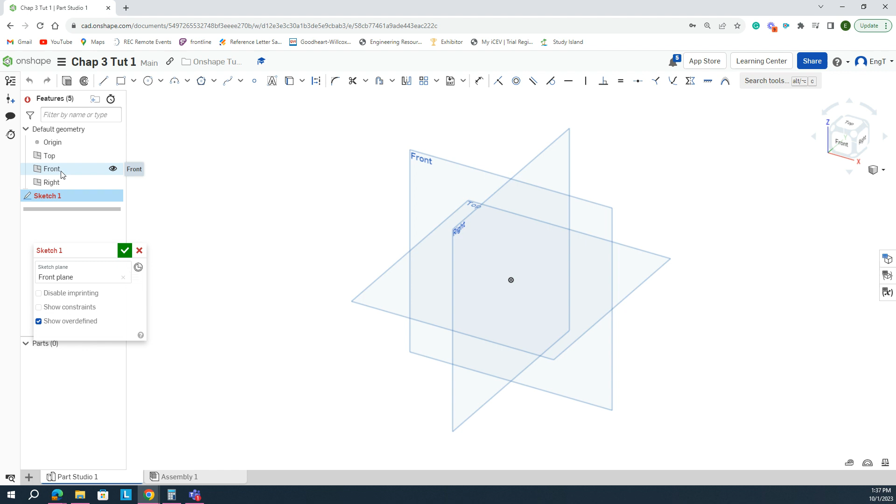Now the Onshape Part Studio pops up. We're going to click on sketch, and then select the front plane. Once we select the front plane, I want to hide the other three planes. So I'll right click on one of the planes on the left, or I could right click on the plane over here, and go to hide all planes. So I'm just left with my sketch plane.

Then I'm going to click the letter N, or go to view normal to sketch plane. Now this particular drawing starts out with a rectangle.

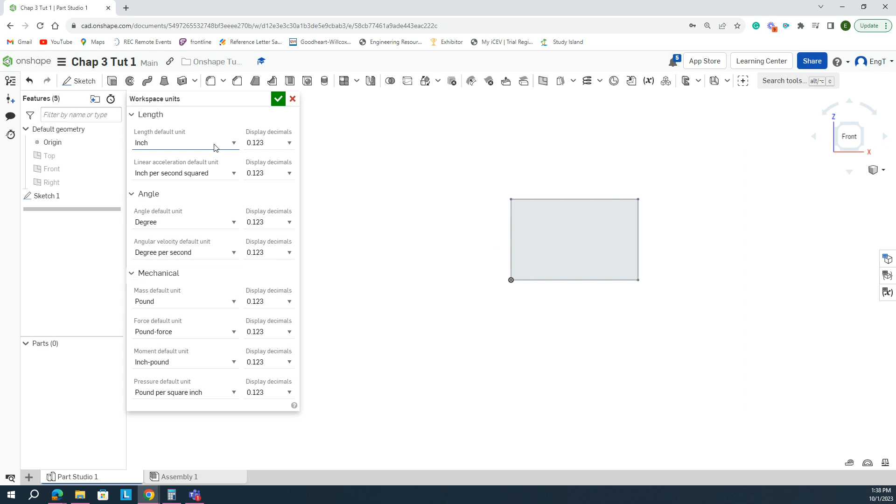So I'm going to go ahead and start out with a rectangle, but I noticed I did not change my workspace units. So it's in inches. I'll quickly go into my menu button and select workspace units, and change that to millimeters. Hit the green check to enter my settings, and then I want to continue this sketch.

Now to continue this sketch, I'm going to double click on sketch 1 to reactivate it because we weren't finished with it yet. If you notice, I started at the origin. Now I'm going to activate my dimension tool.

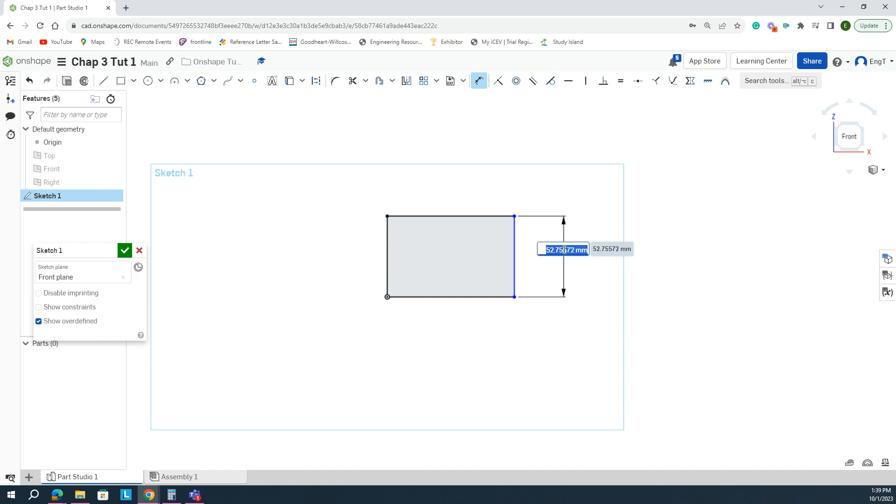I'm going to put the dimension for this line, which is given as 40, and the dimension for the top, which is given as 50. Now that my sketch is fully defined, I'm going to hit the green check to enter those, and then right click and go to isometric.

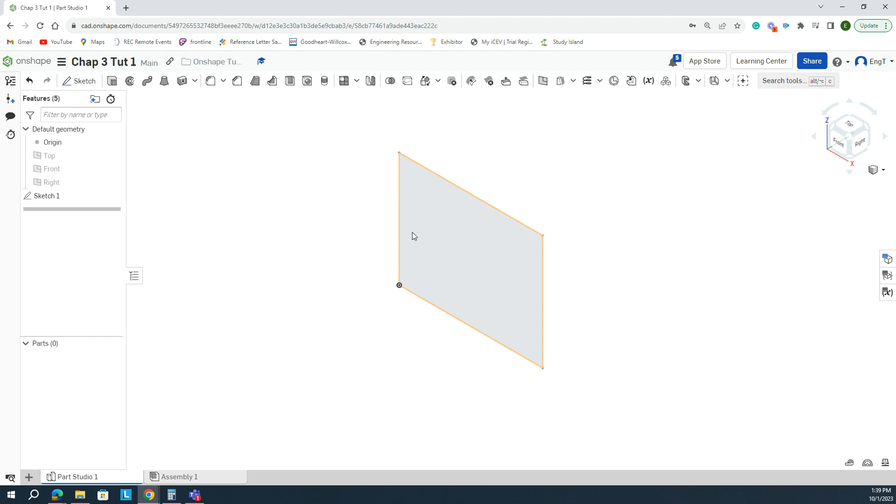Now I'm just converting the sketch to an isometric view. Okay, now we are required to convert that sketch to a three-dimensional view by clicking on the extrude button.

Once we click on the extrude button on the top left of the screen, we're going to change the depth to 65, and then click in the space that we're trying to extrude.

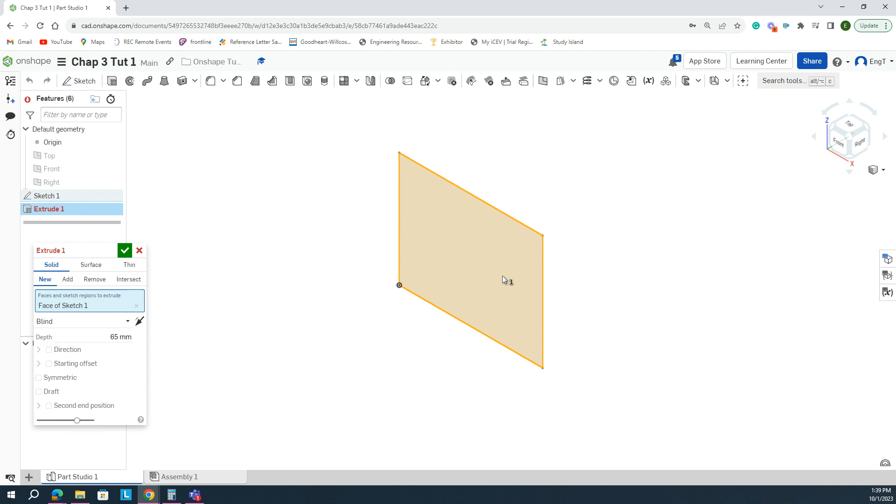Now if I wanted to change the direction of the extrude, I could have clicked on this button to change the direction, but it doesn't matter at this point. We just want to make sure our shape is extruded.

Now we have our isometric block. There's a cut that goes through the center. Now how do you do that?

We're going to select the face that we're going to create the sketch on to cut it through the center of the drawing. So I select the face by clicking here, and then I'm going to click on sketch.

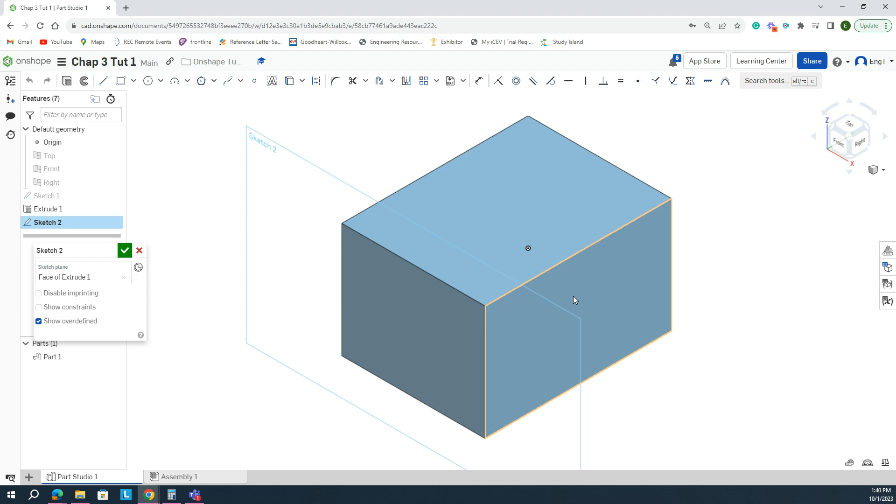Now if you notice, my sketch plane pops up on the outside of the drawing, and as I right click to rotate it, you'll see that the sketch plane is on the outside of that face. Then I'm going to right click and go to view normal to sketch plane.

I'm going to activate the rectangle tool again, and slide or hover over the right side of the box or the right line. As it changes to orange, I'm going to click it and make a shape.

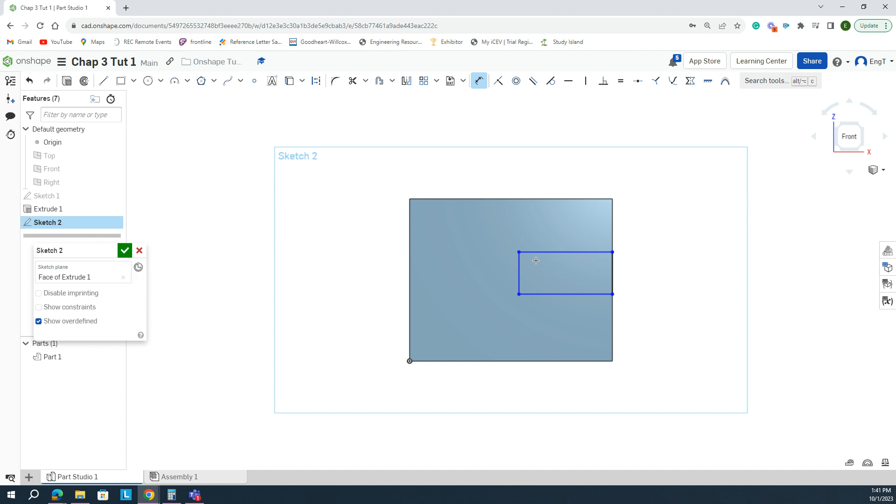Now on that shape, I'm going to activate the dimension tool to fully define this sketch that I just created. So the top line is given as 38.

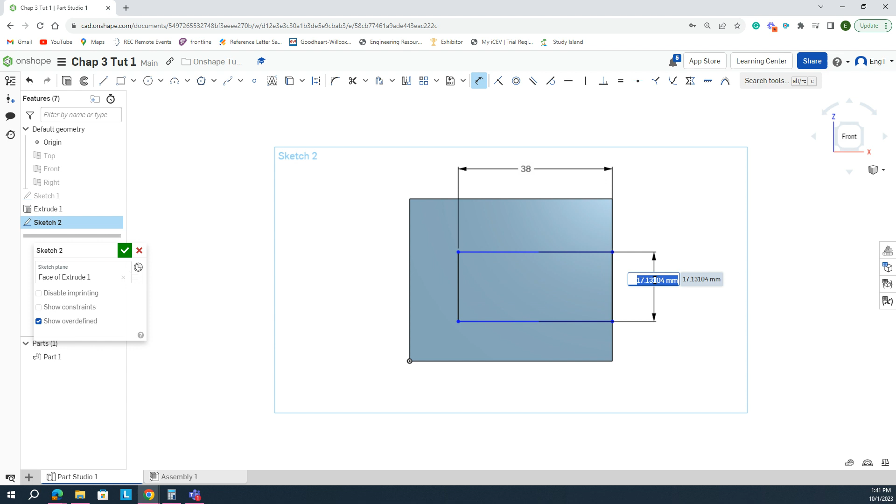The distance between the two lines is given as 12. I'm trying to get the distance between these two lines. I could have clicked right here, or I could have selected this line and this line, and that's what I did. I clicked this line and then clicked this one to pull that dimension out, and that's given as 12. Then the distance from the bottom to this line is 14.

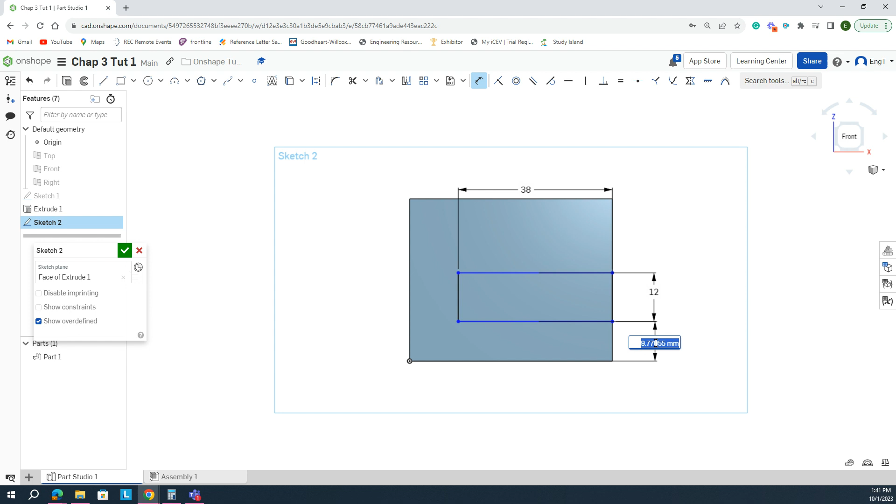Note when I try to select this short line, the entire line is selected. I just want the distance between here and here. So I'm going to click this line and then click that line, pull it out, and I'm entering my 14. Now notice as I added that dimension, the sketch becomes fully defined, or black.

Now I'm done with that sketch. My dimensions have been entered. I'm going to hit the green check, and then I'm going to go back into isometric.

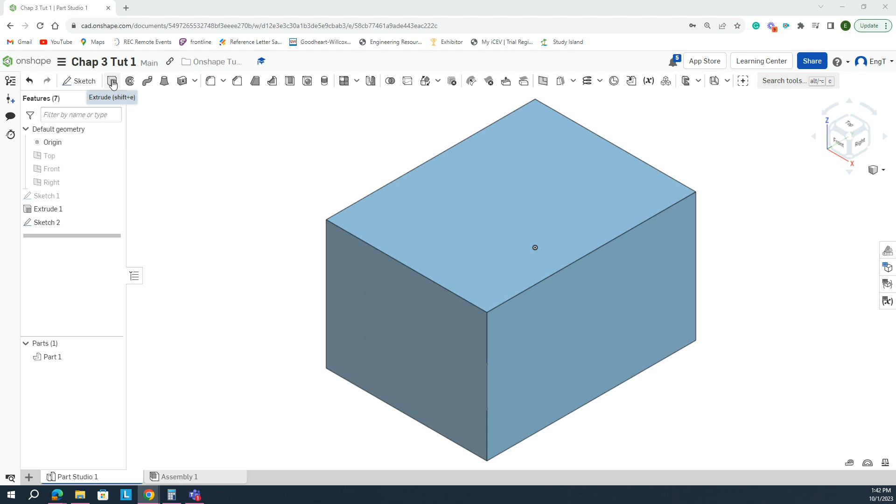Now I need to remove this whole section. So to remove, you're going to go back into extrude, and we're going to select remove, and we're going to click the entity that we'd like to remove. I'm going to click on this sketch right here.

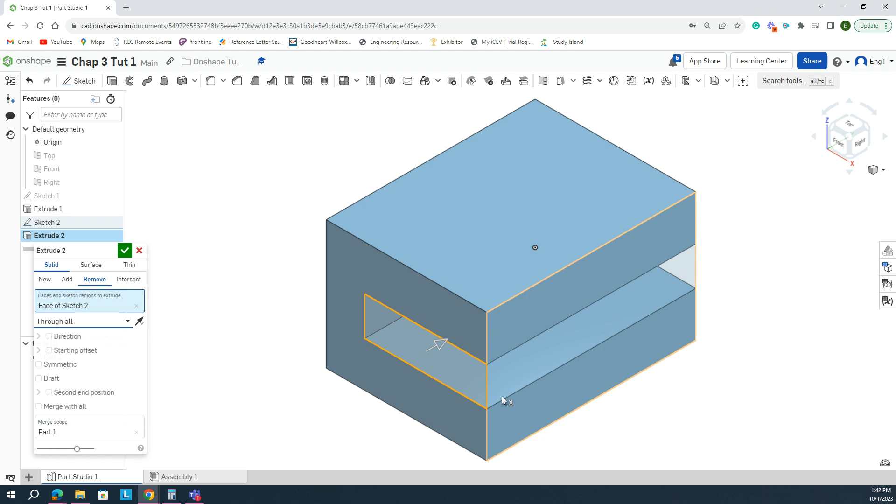Now, after I click on that sketch, I want it to remove it all the way through, so I'm going to select through all. Once I select through all, you'll notice that it took the entire piece all the way out. So now I have that section removed.

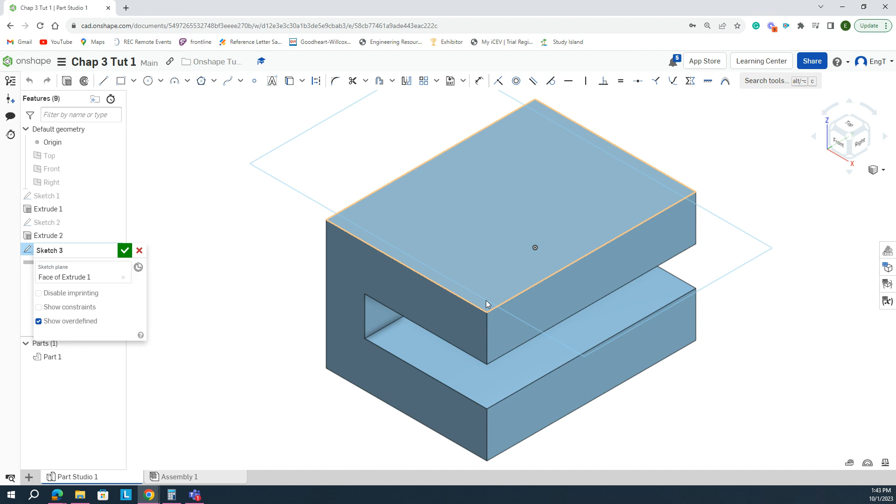Now there's also a cut in the top of the block that we're trying to recreate. To do that, we need to make a cut on the top face. So I will click on that top face, and I'll go back to sketch, and you'll notice that sketch plane 3 pops up on the top.

Once sketch plane 3 pops up on the top, I'm going to press the letter N, or I'll right click and go to view normal to sketch plane, just to kind of square it up.

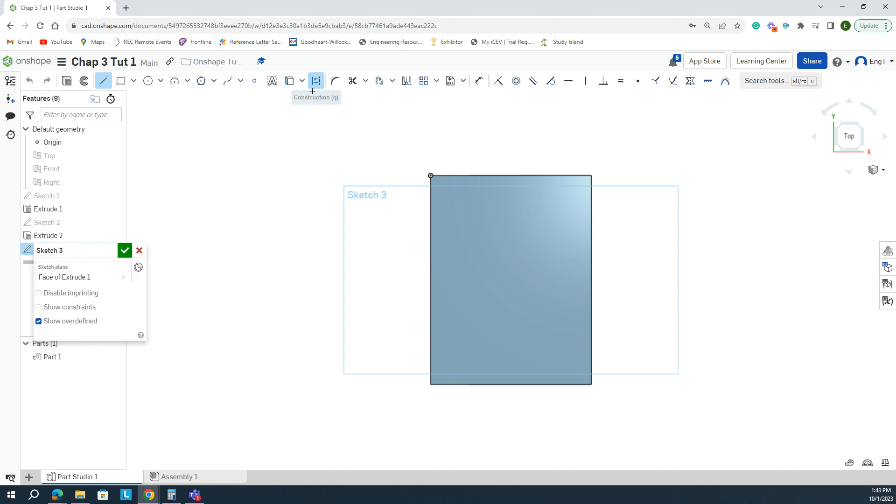Then I'm going to create a construction line by clicking the line tool and clicking the construction tool. I'm just going to hover over the left line to find the center. If you notice that little yellow square pops up, I'm going to click it, and then connect horizontally across to the other side to find that midpoint. Now that line is fully defined because it's halfway between the entire shape.

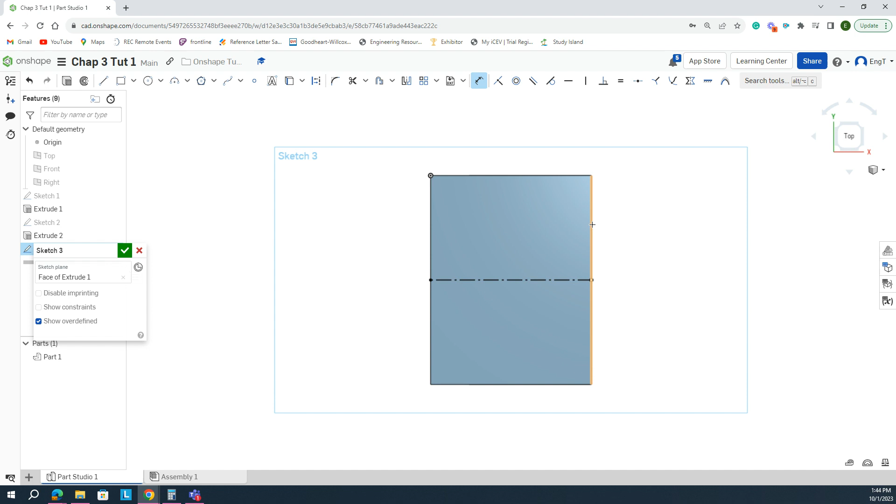Now we need to create this sketch entity on the top. So I'm going to slide here and select that line. Wait, I'm still in dimension, so I need to go back into my line tool. So I'm going to slide on this line, click it, and just recreate a shape on here.

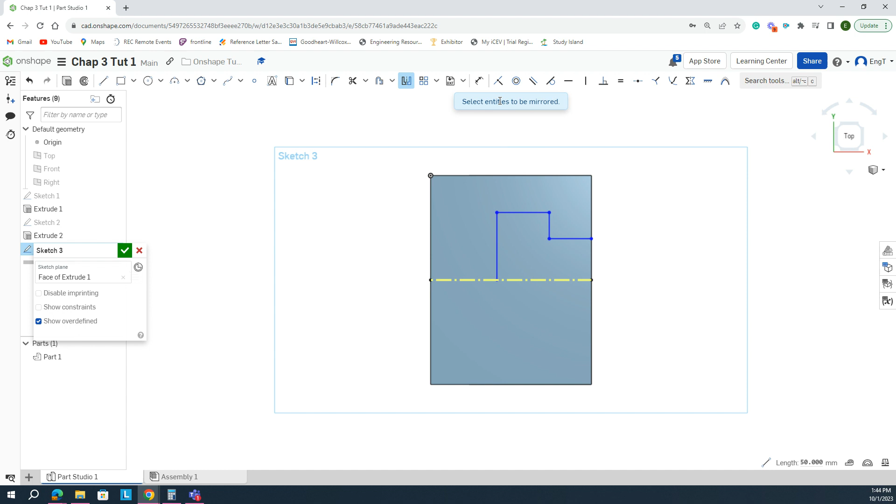Now we're going to use the mirror feature to mirror these lines over onto this side. So I'm going to select mirror. It says select the mirror line, and I'm going to click this as my mirror line. Then it says select entities to be mirrored, so I'm going to click 1, 2, 3, and 4. Now I'm done with my mirror, and I've recreated the entity on the other side.

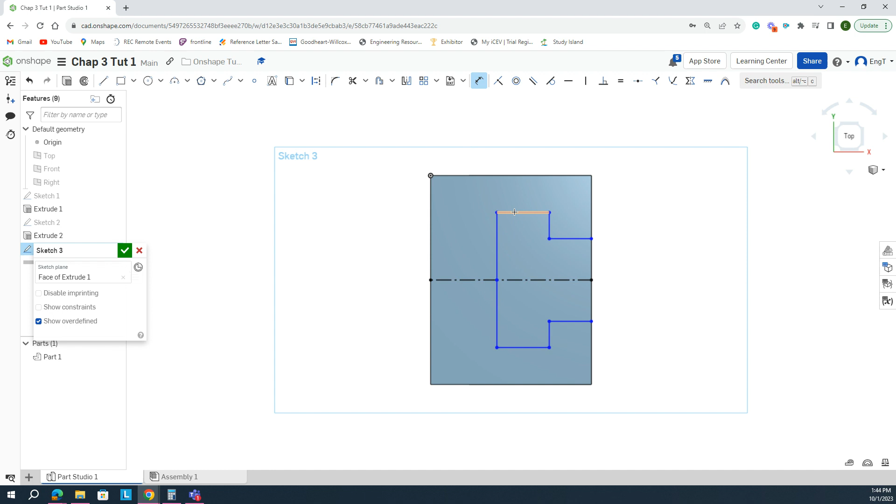Now to add the dimensions, I'm going to select the dimension tool and place the dimensions. I need a dimension for this, the total line right here. Notice when I try to select it, it's 2 separate lines, so what I'm going to do is click the top line and the bottom line and pull that out. I'm going to apply this dimension right here and pull that up.

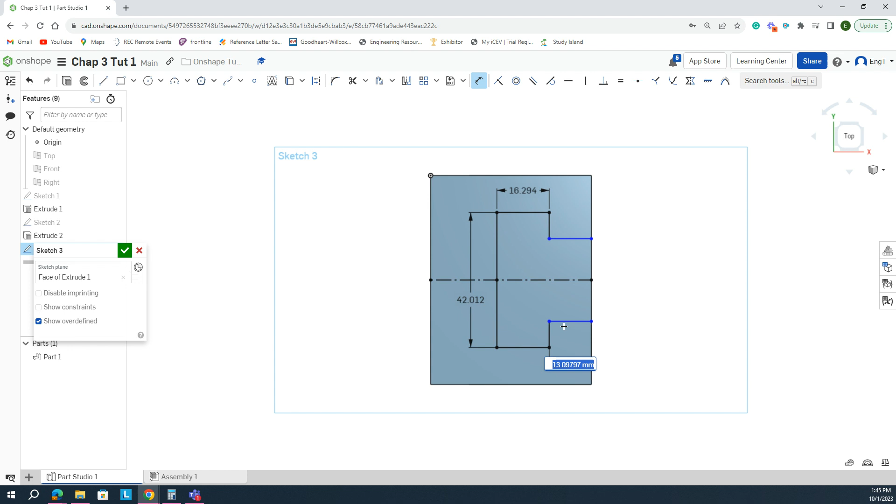You'll notice I did not change my 40. It's because I have an irregular shape, and I don't want to change the dimensions until the entity becomes fully defined. So I need to enter this dimension right here, and then the distance right here. Now my sketch is fully defined.

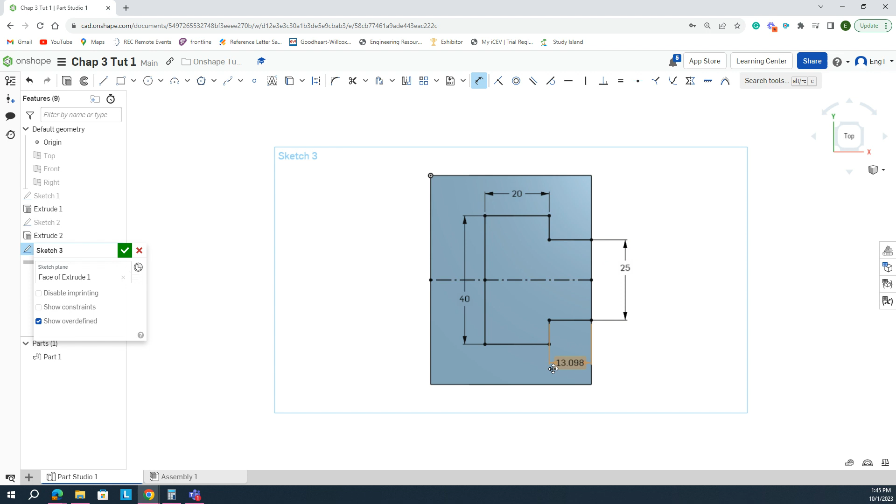I can go back and change the values. So on the back side, this is 40. This dimension right here is 20. This dimension on the right is given as 25. And then this dimension right here is given as 8.

Once I'm done with that, I'm going to hit the green check to enter that. Then I'm going to right click and go to isometric.

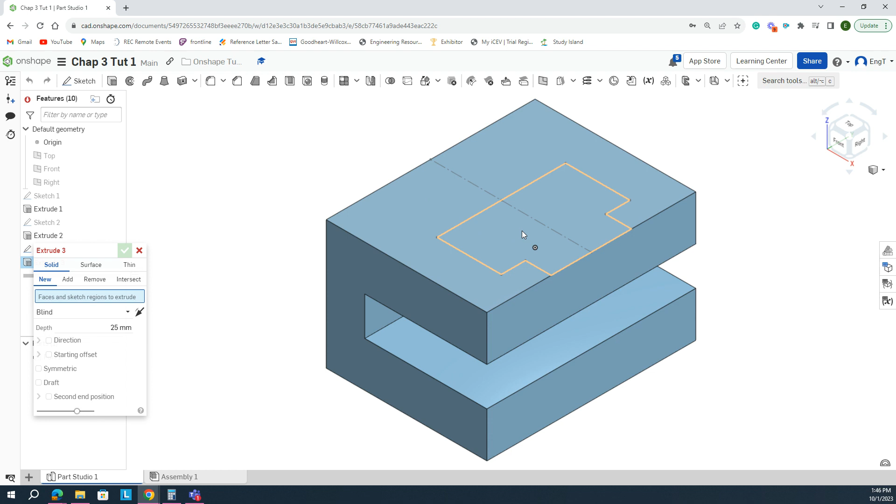Now I am going to use the extrude tool to remove this section. I'm going to click on extrude and select the entity or the space that I want to remove, then change it to remove. If you notice, when I clicked remove it went in, but I don't want it to go to depth. I want it to go up to the next face, so I'm going to change blind and go up to next. This stops it right as it gets to the end of this 3D section, as it gets to the end of the cut. So I did up to next, and then I hit my green check.

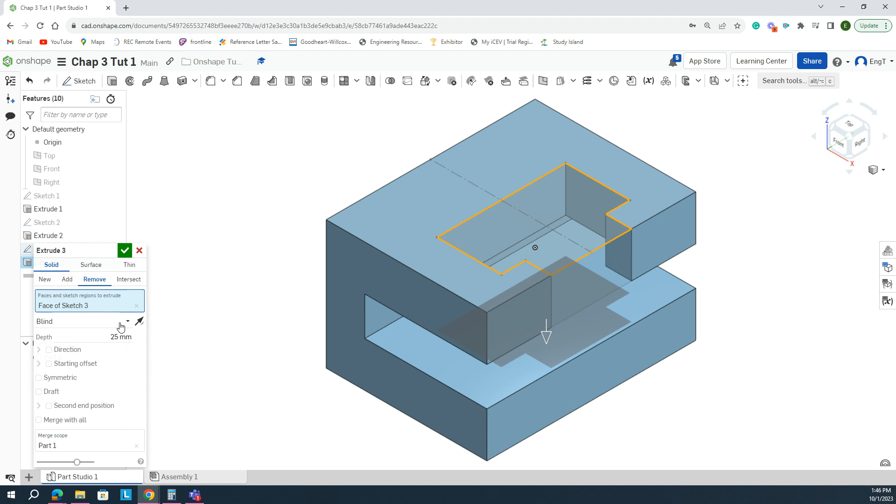Let me just run that back. So I'm going to go to extrude, select remove, and select the entity I would like to remove. I don't want it to go to a particular depth, I want it to stop at the bottom of this face. So I'm just going to select blind and go up to next, and hit the green check. Now I have removed that section.

Now the last part of this block has a rectangular piece that's connected on the front end.

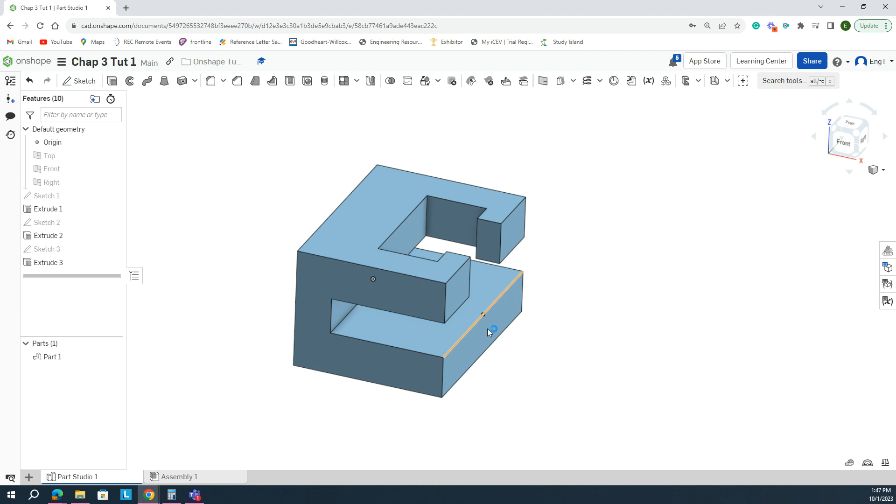Now what I'm going to do, to create my sketch, is turn on my top plane or make it visible. Then I'm going to create a sketch on that top plane and make my top plane invisible. Now if you notice, that sketch plane is right on the bottom of the drawing. I'm going to hit N to view normal to sketch plane.

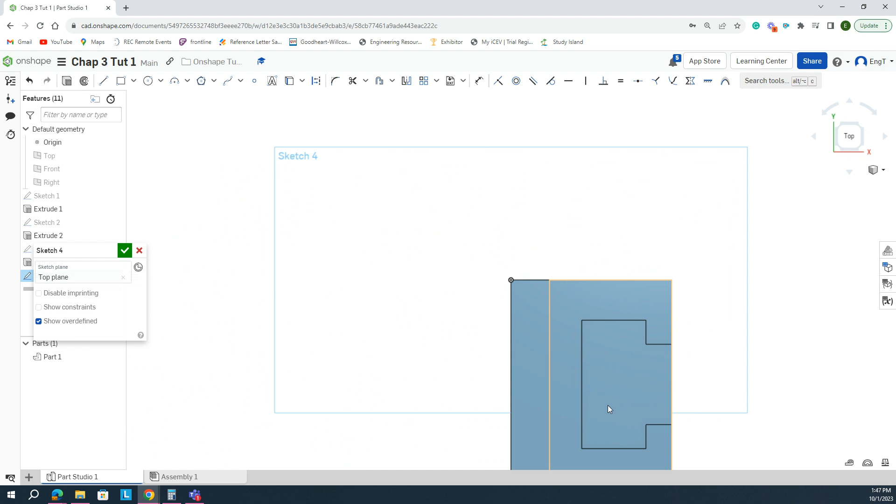Could have right clicked, but I'm just selecting Enter. Then I'm going to create my rectangle tool. If you notice, as I do that, right here you see it snap into that midpoint. I don't want it to snap to the midpoint, so I'm just going to go just beyond that and create my shape. Now the dimensions are given as 12 by 25, and it's coincident to this point, so it's connected to that point.

So I'm going to activate my dimension. The width is given as 12 and the height is given as 25. Now my sketch is underdefined, it's not fully defined because the lines are blue, and what that means is if I try to move it, it will move within the sketch plane.

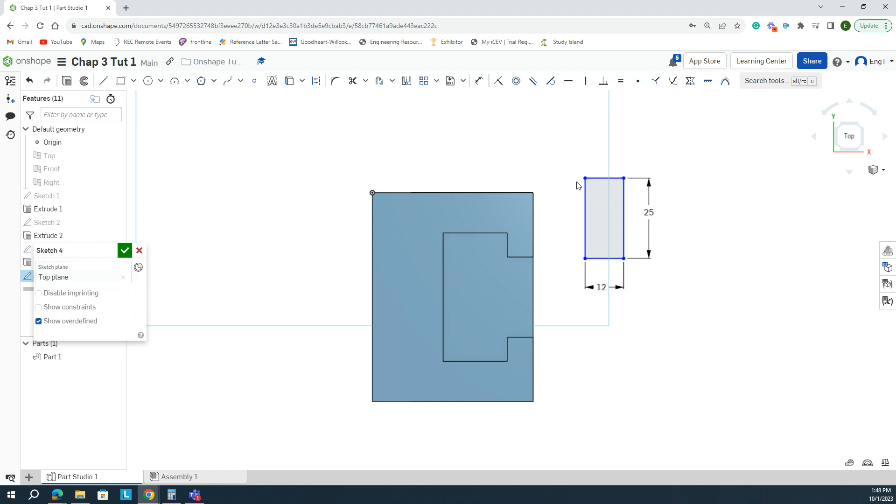Now I want it to attach to here, to this corner. So what I'm going to do is select this point and click this point, and say that both are coincident. If you notice, the sketch attaches to the drawing and now it's become fully defined, because it is now referenced to the origin by connecting to this part of the drawing.

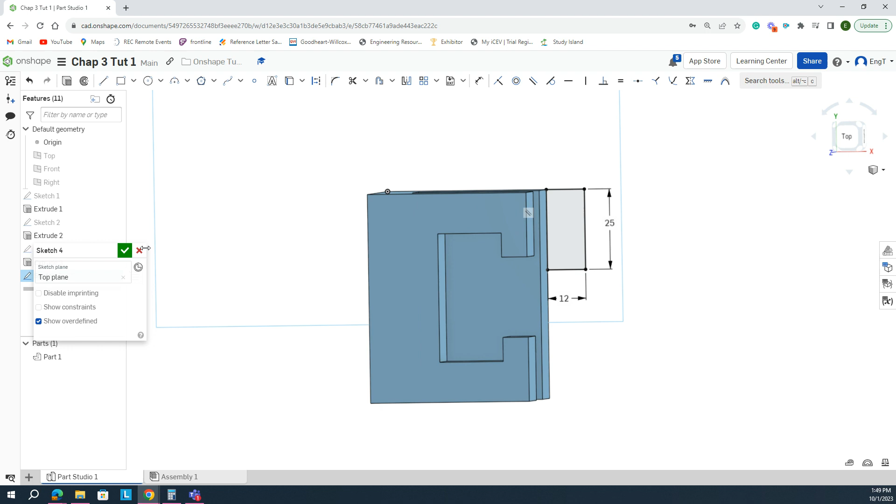Next step, I'm going to hit my green check, right click and go to isometric, then go to extrude. I'm not going to create a new part, I want to add, so I'm going to click on add because I'm adding to my existing block. I'm going to select this portion, and I don't want it to go to a particular depth, so I'm going to select up to face because I want it to go up to a particular face.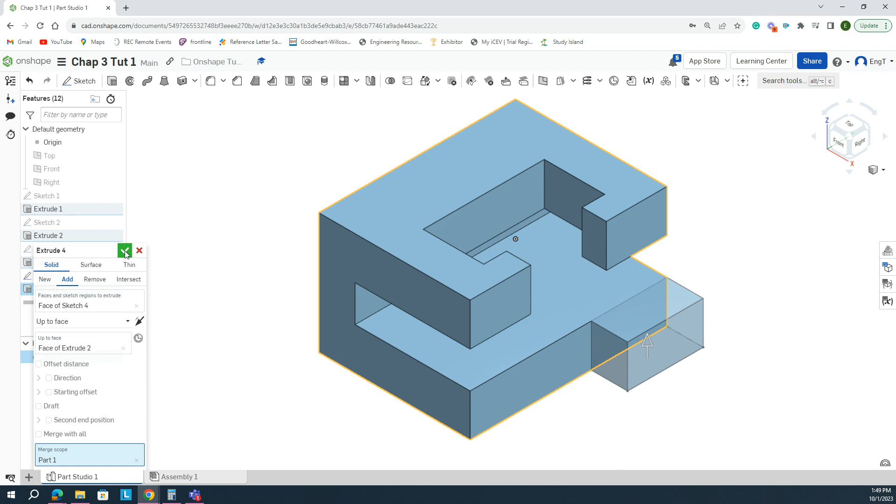So I'm going to switch from blind and go up to face. And which face are we talking about? We're talking this one. If you notice, the height stops right there. And that is how you recreate the sketch given for tutorial 1.